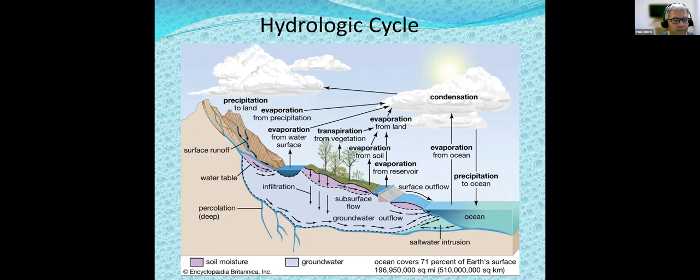Now, the next 2 slides I took directly from the Texas Water Development Board report from 2022. This report is updated every 5 years; the most recent is 2022. This just highlights the continued challenges for those of us who live in Fort Bend County and Texas in general. We'll be providing a link to the interactive version of this report on the PowerPoint, so you can go in and check it yourself. There's a lot of information if you're interested.

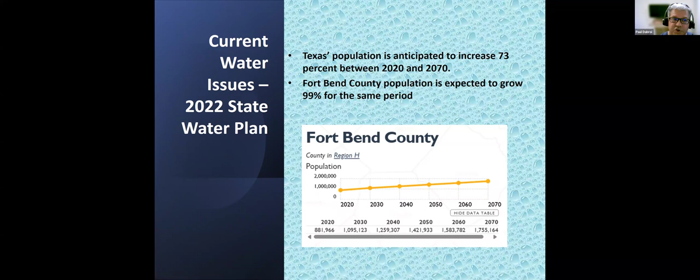Now, at the same time, projections for water are for water needs to outpace water availability over the next 30 to 40 years. If you look at the chart on this slide, Fort Bend County demand could exceed supplies by as early as 2040, as indicated by the purple bars.

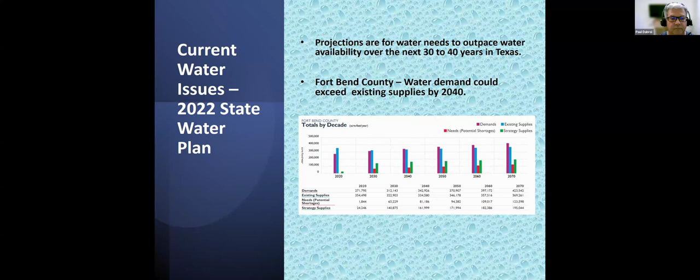This slide is from Water My Yard, and they state that over 50% of landscape water is currently wasted due to overwatering, inefficient watering practices, poor maintenance, etc. By 2070, probably 10% of new water supplies are expected to come from conservation, and that means doing more with less.

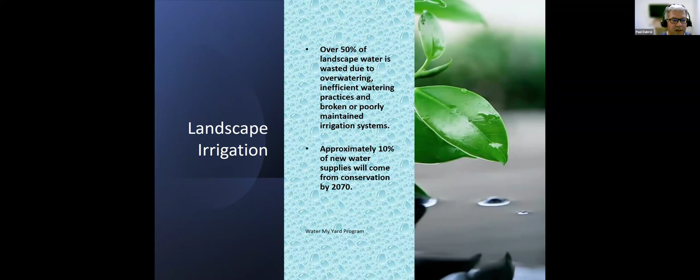Future landscapes must conserve water to be sustainable. The second bullet is very important, that irrigation efficiency should be considered during the landscape design process. As they design these master plan communities, if they spend a little more time designing efficient irrigation systems, we could save a lot more water. And the bottom bullet, obviously, landscapes do not waste water. People do.

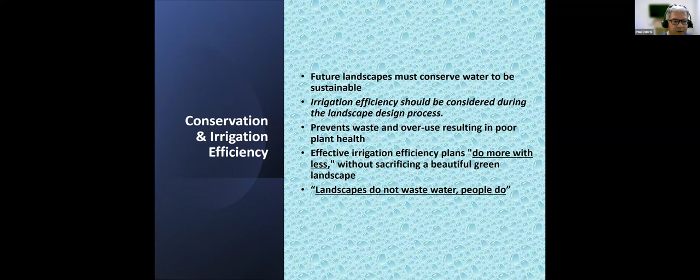So what are we going to learn today? By the end of this presentation, we hope to help you understand how to audit, maintain, and repair your system - minor repairs. We'll explain how to modify your system for greater conservation and savings, review best management practices, and hopefully increase your confidence in maintaining your own system.

I tried to come up with three basic pieces of advice I could give a homeowner regarding their irrigation. Number one, water only when needed. Two, apply just enough water. And three, maintain your system. From this point on, everything we discuss for the remainder of the presentation can be connected to these three points.

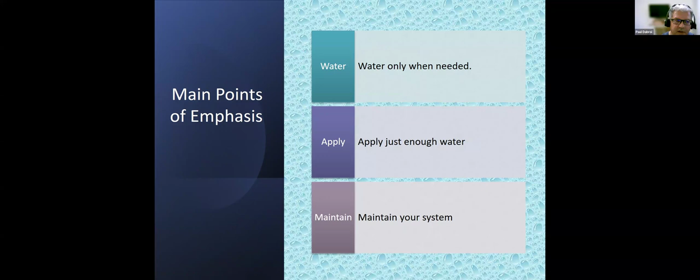A little about irrigation efficiency. Water usage during the summer increases between 35 and 70%, primarily due to irrigation. It's estimated that 89% of single-family households have irrigation systems. That's a large number, but it also includes people who just have a hose. And a high percent of homeowners don't fully understand how their irrigation should work.

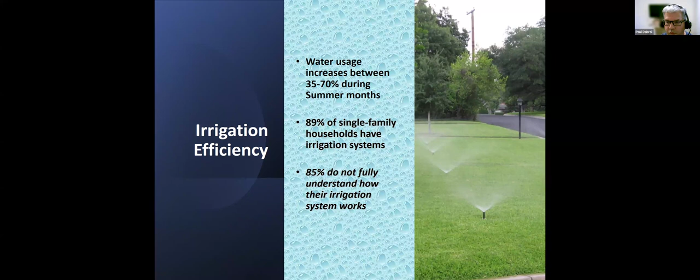You've probably heard many times that the average homeowner overwaters, not necessarily because they intend to - they just don't know how often, how long, individual plant requirements, how to set their irrigation controller, and how to maintain their system.

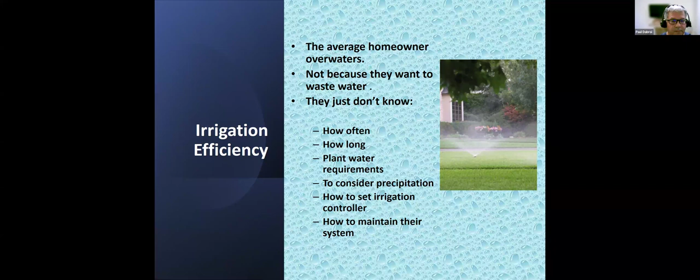Best management practices - this is important. The first bullet was discussed at length in the earlier presentation I mentioned. But as a rule, if you're going to run your irrigation system, you should run it early in the morning and be completed no later than 10 a.m. Actually, the sun becomes pretty strong after 8 a.m., so 8 a.m. would be my recommended cutoff. If you need to judge water needs for your landscape, do it in the morning before it dries out and shows signs of stress. Water deeply and infrequently - we will repeat this throughout the presentation.

Your lawn should only need to be watered once or twice a week. I only water my lawn once a week - Sunday night, system comes on at 1 a.m., I run 4 cycles, 8 minutes each, done by 5. Regardless of whether we have drought or near drought conditions, that has worked fine for me as long as I've lived in Texas. You want to water slowly for better absorption.

Use drip irrigation or soaker hoses where possible in non-turf areas. One inch of water will penetrate to a depth of about 6 inches. Use cycle and soak - that's basically what I just described, and we'll discuss that later in the presentation. Try not to water on windy days - this used to say do not, but it's Texas, do your best.

You should check your irrigation system monthly to make sure it's operating properly. I can't say I check mine every month, but I do it on a regular basis, and most of the time I'm confident I've caught most of the major issues.

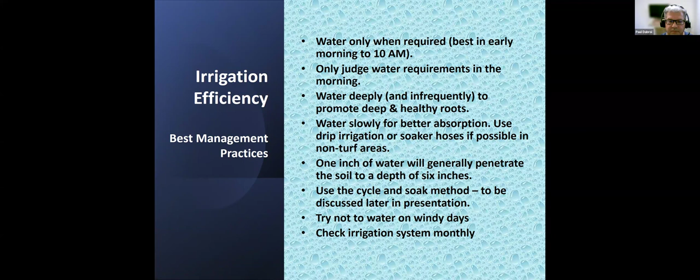This is a good quote that can apply to a lot of things, and many of you have probably heard it already: the best fertilizer is the gardener's shadow. This can also apply to irrigation systems as well, and what it means is a little vigilance goes a long way in eliminating or reducing most problems.

Next we're going to get into the components of your irrigation system. These are the main components you'll see in your system - some visible, some not. We'll start in the bottom right corner - that is your backflow preventer, which is basically a one-way check valve that prevents contaminants from your irrigation system from getting into the water supply. I'm going to guess most towns in the Houston area mandate this for residential irrigation systems.

Then we go to the controller, that we'll spend a lot of time on in our next slide. The controller determines when you're going to water, how long, which zones, etc.

Let me make sure my pointer works here - okay, there we go. This is the control valve, and this opens and closes based on your program to direct water into your sprinkler heads. A couple different sprinkler heads here on top - we have pop-up rotors, and then just pop-up spray sprinklers.

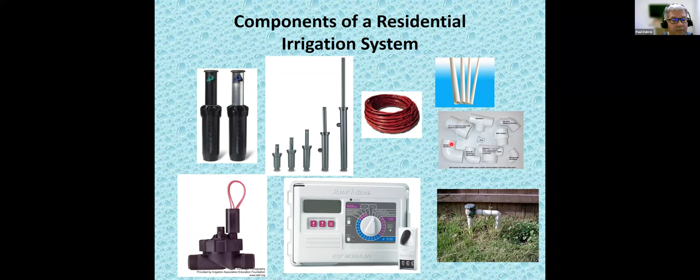So this is the controller, and this is the brain of the system. There are many brands and models, many with similar features. We've chosen this one not because we're endorsing the brand, just because it's representative of what you might see when you go to purchase an irrigation controller. This particular controller will allow up to 22 zones. That is a large yard. I only have 6 in my yard.

I'm going to go around the dial here and explain what all these features are. The red here is off, that's my favorite setting. You should only run your irrigation system to supplement natural rainfall, so if you don't need water, turn it off. The auto setting will basically run your different programs. So if you program your system to come on a certain day for a certain amount of time, you just click it to auto and it'll continually repeat that cycle.

The blue buttons are just basic settings. When you first plug in your controller, you're going to set the current date and time, and from there you'll set your start times, how long each zone is going to run, and which days each zone is going to run. This particular controller also offers additions of different weather sensors, like a freeze sensor and a rain sensor.

There's a seasonal adjustment setting, and what that means is you can change the amount of water you're distributing based on the time of year. So for instance, if 10 minutes was your baseline, that would be 100%. In August, if you wanted to run for 11 minutes, you would change that setting to 110%. Same thing in early spring - you're just turning your irrigation system on, you're still getting some rain, so maybe you only want to run it at 90%. If you want to run it 9 minutes, you change that setting to 90%.

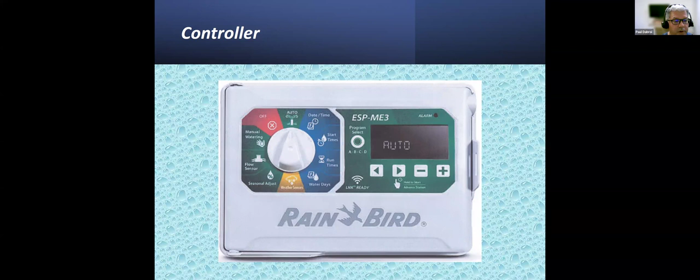With the LNK-ready function or option for this particular controller, you can control your controller through an app. If you absolutely need another app on your phone, here you go.

Now we're going to take a quick tour, and after the tour we'll answer a few questions. So if you were to rip the lawn off your yard, you would see something like this. The only visible parts of your irrigation system would be the tops of your valve boxes, and maybe the actual tips of the sprinkler heads. We're going to go around here and take a few minutes.

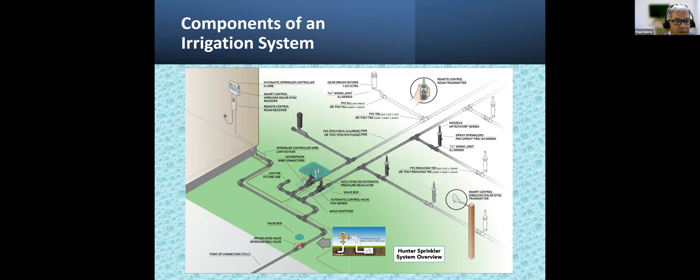Our first stop is the shutoff valve. You may or may not have a shutoff valve in your system - I don't. If you have it, it may be buried in your lawn, in your planting bed somewhere. If you don't have a dedicated shutoff valve, you can shut off your system from the backflow preventer.

Next, you have your valve boxes. This particular valve box has a green square cover, and it contains 2 valves. At my house, I have six zones, 6 little round covers, one valve in each one. These are always underground. This particular system also has a dead-ended cap for future use. So let's say you wanted to add another zone, like a dedicated zone for drip irrigation - you already have a means to do that.

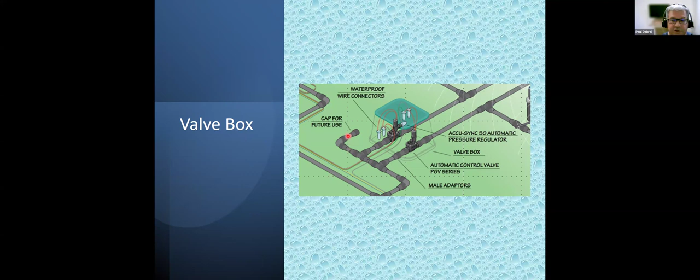These are just traditional pop-up spray heads. This piece here that's circled is the solar sync transmitter. This sensor automatically adjusts the controller runtimes based on the local weather data. It helps to reduce usage. It is contingent on a reliable wireless connection.

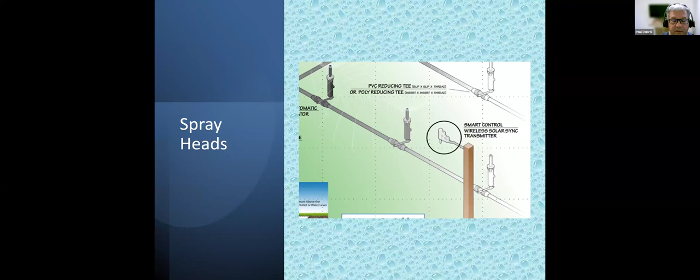This is just a rotor. Rotors are high input sprinkler heads used for large areas, playgrounds, golf courses, etc. It's shown on a swing arm type connector, which gives you a little bit more flexibility regarding direction, height, etc. And then obviously the controller, we've already talked about that.

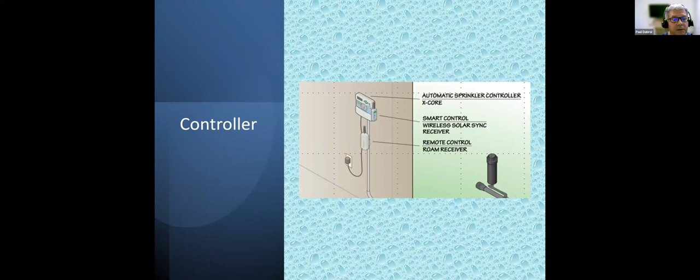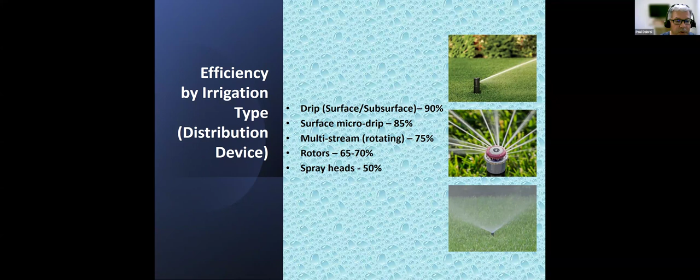All right, we're going to keep going. Drip irrigation. So let's start.

Okay, so drip is about 90% efficient, and again, good for your entire landscape, including lawn. Micro drip can be used in rows for individual plants and containers.

And so looking at the photos above here, starting in the bottom right, this is what I just call a commercial type drip tubing. This is half inch. It's arranged in a grid, and it'll distribute water at a uniform rate across your planting area. Depending on the type of soil you have, will determine what the recommended spacing is. So for instance, for clay soil, it might be closer together than if you had a sandy type soil. You just need to follow the manufacturer's instructions.

The two top photos show a micro drip system, and they also deliver water with a half inch, I call it feeder tube, but then you can branch off into these quarter inch thick tubing, and you can have either a traditional drip line like is shown here, or there's different types of nozzles that I'll show in the next slide. And I mentioned this can be connected to your hose spigot.

This is actually one for my house. And so what you have here is you have your timer, and then there's a wire mesh filter, and then a pressure reducer. And again, I've used this for a few years, very happy with it. Really easy for do-it-yourselfers to put in a micro drip system.

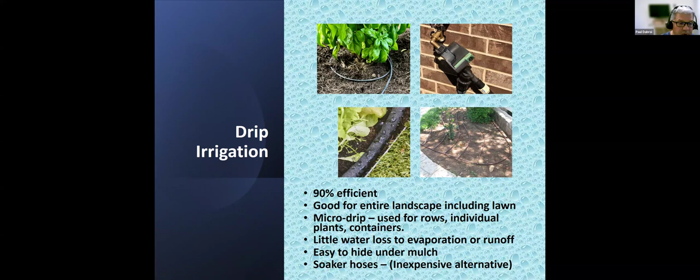And so these are the different nozzles, drippers, etc., that are available with micro drip. This would be just a traditional drip line. The spacing can vary between, say, 6, 12, 18 inches. All types of little emitters that you can just plug into the main tubing. The output really varies by what you're trying to accomplish, the size of your plant.

And then actually just little miniature sprayers. This is a rotating sprayer similar to the rotating nozzle. It's just at a much lower rate of volume. And it's funny, I heard a presentation recently by a popular gardener on YouTube, and he uses micro drip, and he said he prefers the sprayers versus the drip line just because he can see it. He can see the water coming out, gives him a little bit more peace of mind versus if it's a drip line, which is trickier to see, especially if you have your bedding covered in mulch.

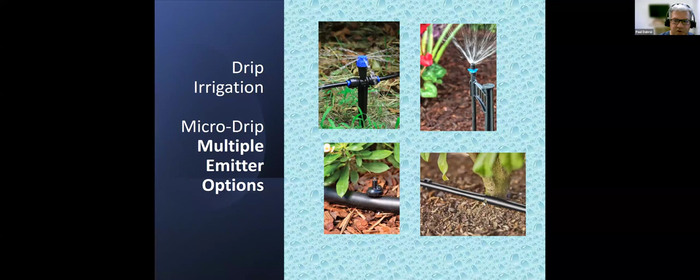All right, and so we talked about connecting a drip system to your irrigation system, and here's an example in this illustration. You have your irrigation valve as a built-in pressure reducer, and then you also have your mesh screen filter.

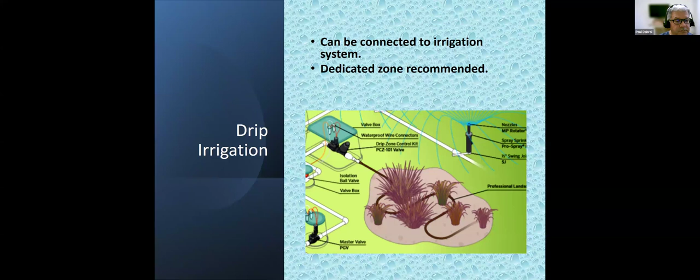Now next we'll get into how to audit and repair your system. The first thing you're going to want to do is become familiar with the basic components of the system. You want to learn how to do a manual station run.

As you're auditing your system, remember the gardener's shadow - walk around your yard once a day, take a look at things, gauge the condition of your plants. Looking at your plants and lawn can give you a heads up whether you have an irrigation problem. For instance, if you have a perfectly round dry spot in the middle of your lawn during summer, that may indicate that particular pop-up is not working correctly.

Same with your planting beds. You have a long bed of ornamentals - half the bed's looking kind of dry, half the bed's looking good. Same thing, check the irrigation in those areas.

Look to see if anything's obstructing the spray - you might have to trim the branch off a shrub. Misaligned heads where water is going where it should not be. Those are the easiest things to fix.

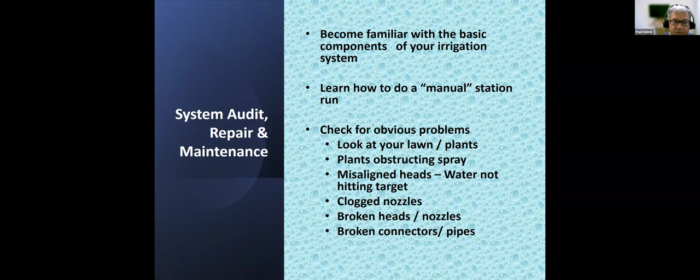You could have clogged nozzles where the spray pattern isn't uniform, or the riser on the pop-up sprinkler head is not popping up as it should. Broken heads and nozzles are pretty obvious. You could also have a broken connector under the sprinkler, or in some cases a crack in your white PVC tubing. We'll go over some of those here in a minute.

When it comes to repairs, I like to look at this like a medical procedure - proceed from least invasive to most invasive, or from easy to more difficult. The easiest things to fix are adjusting the direction and distance of the spray on your individual sprinkler heads.

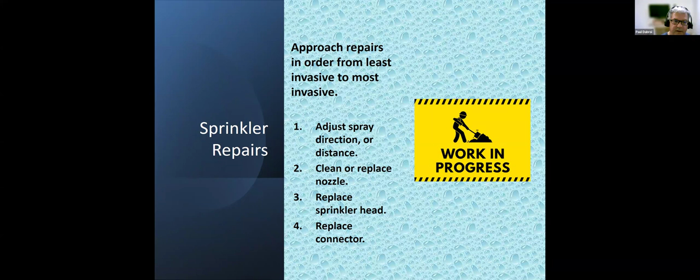Cleaning or replacing the nozzle can be done without removing the entire sprinkler head and digging. If you have to remove the sprinkler head, it's fairly straightforward - you have to dig, unscrew it, replace it, make sure it's aimed in the right direction, and occasionally replace that connector between the bottom of the sprinkler head and your tubing.

I use it to cut the connectors if I need to lengthen or shorten a connector to lower or raise the sprinkler. I've never had a situation where I've actually had to cut the white PVC, and then a utility knife is always handy.

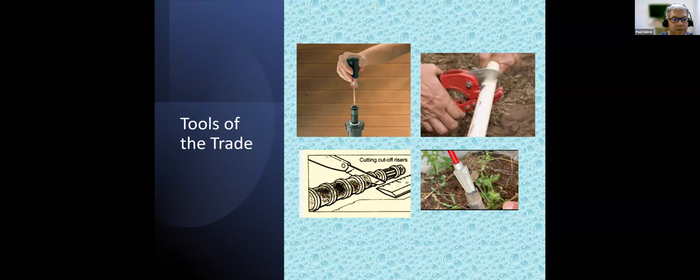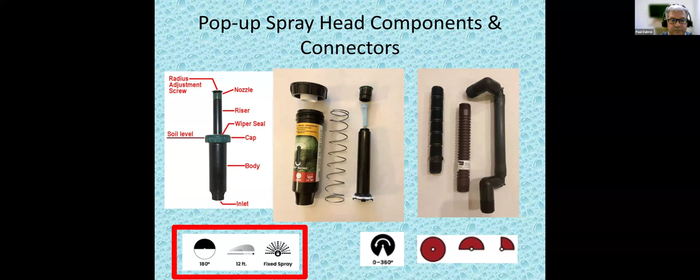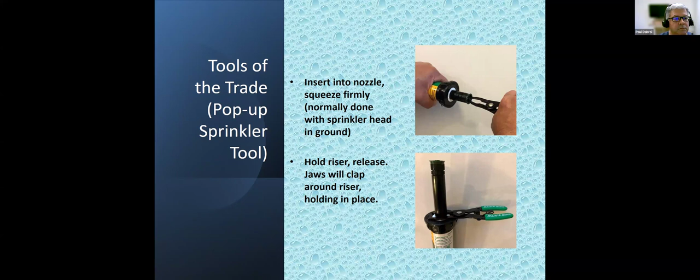All right, next we're going to go through some common problems. Now, I'd love to be able to say that I am somewhat immune to these issues, but sadly, everything we look at here, I've probably seen most of these in my own yards.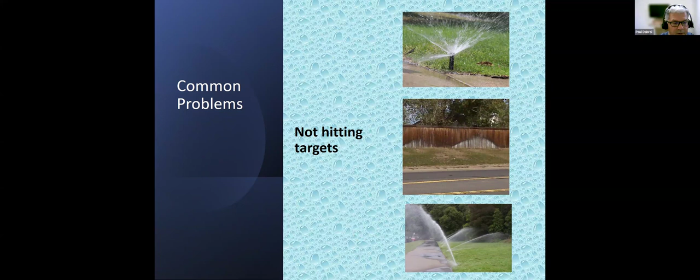This is a rotor that is obviously going in the opposite direction of where it's intended. Pop-up rotors, it depends on the rotor. Some can be adjusted by twisting the riser. Others have a set of screws in the top of the rotor to make those adjustments. But by far, direction is the easiest problem to correct in your system.

Okay, next, the top example, it could be you have a sunken sprinkler head. Over time, the sprinkler heads, your lawn settles, the soil settles. What used to be level with the surface of the lawn now could sink a couple inches, so now when it pops up, it's not clearing the grass. That situation, you'd want to remove the sprinkler head, remove the connector, add a connector with an inch or two extension below, whatever you need, and reinstall the sprinkler head.

You should be good. Now, it could also be you have thatch that's built up over the sprinkler head, let's say during the winter. So try to clear away the thatch and the obstruction. Again, turn it on, see if that'll solve the problem. If not, we keep working our way down.

If there's very little water coming out of the sprinkler head, but water seems to be coming up around the body of the sprinkler, it could mean you have a broken body of the sprinkler head itself, or a broken connector beneath it. Bottom example shows this is a rotor, and it appears to be spraying, there's water coming out of it, but you can see there's water pooling up around. So there's some kind of leak underneath the sprinkler head that's causing that issue.

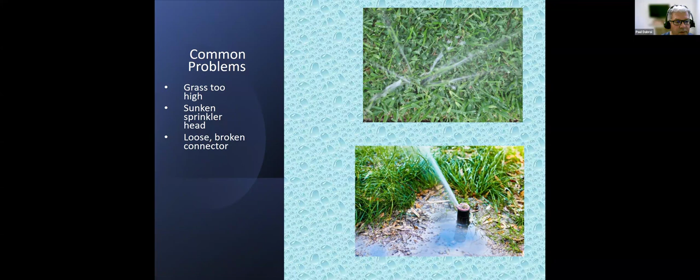All right, geysers of various types. Gotta admit, I had one of these last year. Apparently, I ran over the sprinkler head when it didn't retract properly. Again, pretty easy to fix. You really have to just replace the sprinkler head, unless the nozzle for some reason just popped off.

When this occurs though, it's important you react to it quickly, because while this geyser is going, it's also lowering the pressure for all the other sprinklers in that particular zone. And if you see this happening at your neighbor's house, put a Post-it on their door or something, let them know. I certainly would have liked somebody to make me aware.

This example here is a large pop-up sprinkler, probably in a landscape bed. You can see here there's some ornamental grass around it. Maybe it didn't retract, somebody tripped over it, who knows. The example on the right here, it looks like for whatever reason, the entire sprinkler head disassembled and parts were ejected.

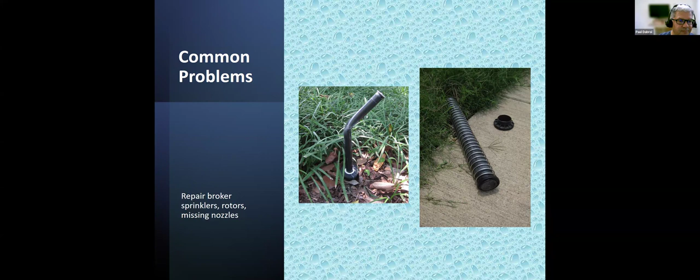In this example, I'm not aware of anybody having a problem with excess pressure around here, but you can see what's happened here is the water coming out of the sprinkler head is atomizing as soon as it comes out, and it's just creating a fog that's hanging in the air, and any little puff of breeze is going to move that water somewhere where it wasn't intended to. Now, the only way to handle a pressure problem is to install a pressure reduction valve on your system, and most likely you would want to call a contractor to do that.

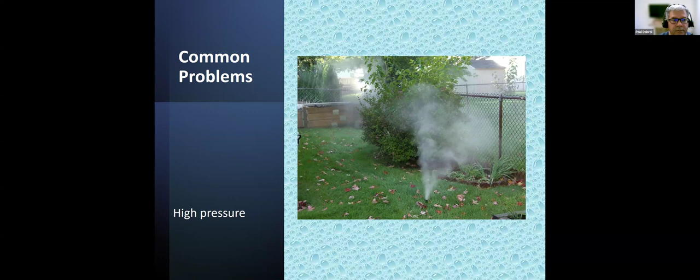Backflow preventer freeze damage. Okay, don't let this be you. All right, show of hands in the audience, who has had this problem? I see a few hands out there. All right, yeah, if you don't cover and insulate your backflow preventer during the winter and you have a freeze, this can happen.

The bottom photo here just shows what looks like a cracked bell on top. The top photo shows what can happen when there is damage. The first year I moved into my house in Fulshear, we had a freeze. I came home from work, got out of the car, heard a loud hissing noise, and sure enough, a part had cracked in mine, and we were able to get it fixed.

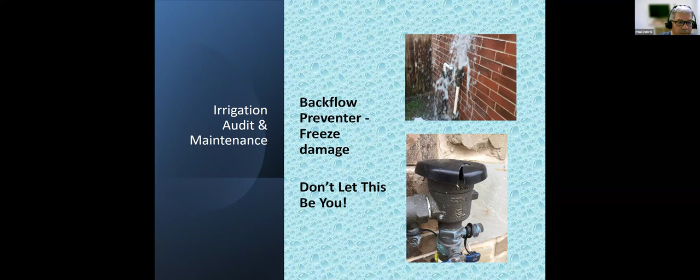All right, now, easy way to prevent this. So what I do is December 1st every year, I close both valves on the backflow preventer. I open the bleed screws to drain any water out. I pop this cover on it, and I'm good for the winter. I would advise, if you're going to use something like that, buy it now or buy it in August. You're not going to find one in January when a freeze is predicted.

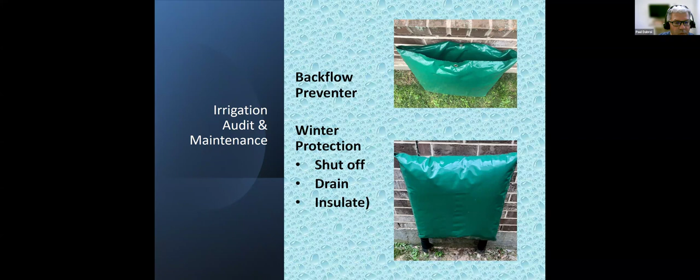And when it comes to running your irrigation system on auto, really 6 months between May and October is the only time you should need regular weekly watering of your lawn. After October, your lawn is not growing vigorously, and it can do very well with less water.

Your drip emitters, we were talking about combining drip in one of your normal irrigation zones, and this is what I was trying to emphasize here. You see, the drip emitters will dispense gallons per hour versus gallons per minute. So 1/2 to 2 gallons per hour versus 3 gallons a minute is a huge difference. And so if you were going to try to have both in the same zone, again, something's getting too much water, something's not getting enough. And the actual amounts are going to vary depending on the pressure, manufacturer, maintenance, etc.

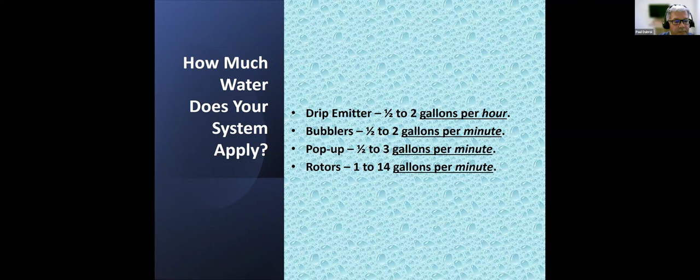Okay, determining irrigation rate. You do not know how much water your irrigation system is applying to your yard unless you measure it. To do that, you can use what they call a catch can test.

The way you do this is you set out the cups in regular intervals within each zone, run your zone for 5 to 10 minutes, measure, record the results from each of the cups, and then you'll calculate your inches per hour, which we will see here.

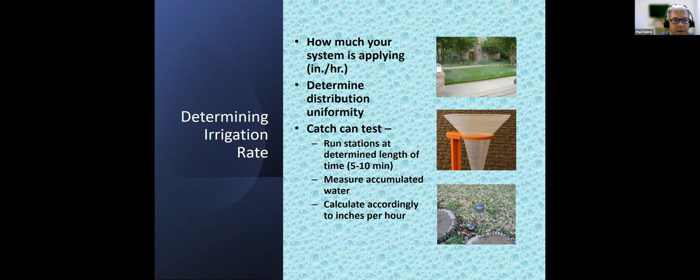So here we go. I recently did this in my yard, and I was pleasantly surprised. For this example, I basically just cut and pasted the formulas from the Aggie catch can test document, and I applied the actual measurements from one of my zones. For this particular zone, I set out 9 different cups, ran the zone for 10 minutes, and recorded the depth of water in each, and that's what you have here. I have some coverage issues in this particular zone. We'll talk about those in a minute.

So basically, you add up all the measurements, and that came to 2.15. If you divide that by 9 cups, that's an average of 0.24 inches in 10 minutes. Divide the 0.24 by the number of minutes, and that gives you the amount of water you're applying per minute: 0.024 times 60 minutes. If I ran this zone for an hour, I'd apply 1.44 inches. Now that's a lot. If I convert that to how many minutes I would need to reach an inch, that would be 42. Basically, if I know that zone is dispensing at 0.024 a minute, and I divide that into 1, it gives me 42.

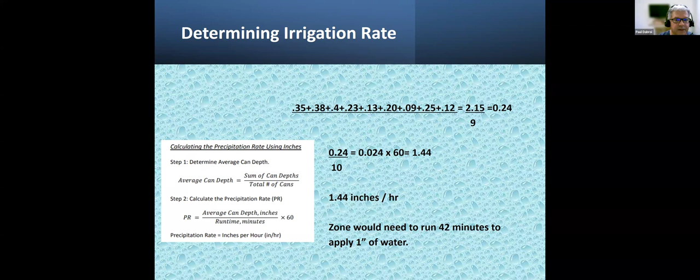All right, now we'll get back to cycle and soak. The best way I can explain the benefits is to consider what happens when you're watering a potted plant or plants in your landscape beds with just hand watering. If you allow the soil to dry out and you go to water the pot or the plant, you notice that the water will pool in the top of the pot or around the plant, and it takes a while for that water to percolate in. Then if you go back a second time, you notice it absorbs fairly quickly. Well, the same situation can occur on your lawn, and that's why cycle and soak is recommended.

I'd say the first line here kind of sums it up for me: deep and infrequent watering trains your roots to embed deeper and spread wider, making them more drought resistant, creating a healthier plant. You can see in the illustration here, if you're watering frequently but only for a short period of time, the root structure is going to be concentrated in the first 1 or 2 inches of your soil. So if drought were to occur, you don't have enough roots reaching deep for water. Deep and infrequent watering will give you that deep, thick root structure, which will allow your lawn to be better able to survive drought conditions.

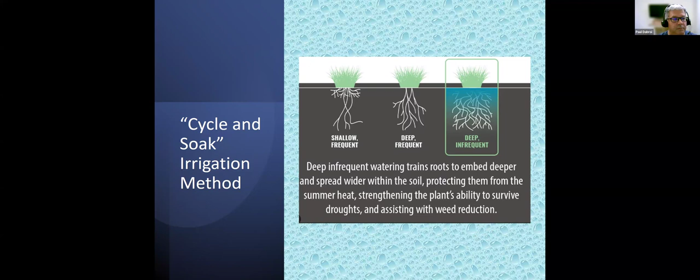So some more details here. This is recommended for clay soils and slopes. You can use this in your lawn area as well as landscape beds. You can do this different ways. My controller has a couple different options. The one I do will allow me to run it 3 or 4 times, and it spaces out each cycle, just depending on what you want to do.

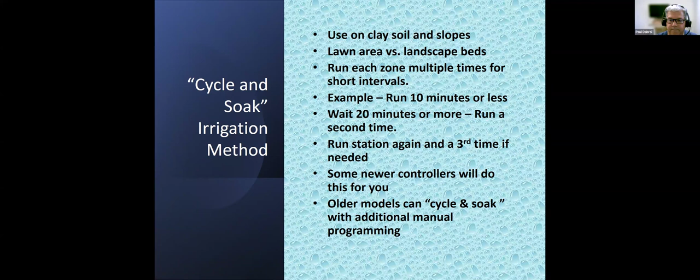There's a lot of new technologies available. You can attach different weather sensors to your controllers. On top here is a rain sensor, which I believe is now required on all irrigation systems in this area. A freeze sensor would be recommended if you live somewhere with early or late freezes in the spring or fall.

The ET controllers—ET is evapotranspiration. These controllers basically monitor weather from centralized measuring areas, then transmit the results through a wireless connection back to your controller, allowing you to water based on current conditions in your area. If you go to Home Depot or Lowe's, there are a ton of different ET controllers. I'm sure the technology will get better over time.

I cannot vouch for the accuracy of these. One concern, at least to me, is the accuracy and relevance of the information being measured. The rainfall in our area is so variable, even within the same town or county. If you're looking at rain coming through at any given time, and that green dot hits you, you have enough rain for the week. If it doesn't hit you, you're dry. So from these remote monitoring areas, as long as that measurement is relevant to my yard, I would be more likely to trust the results.

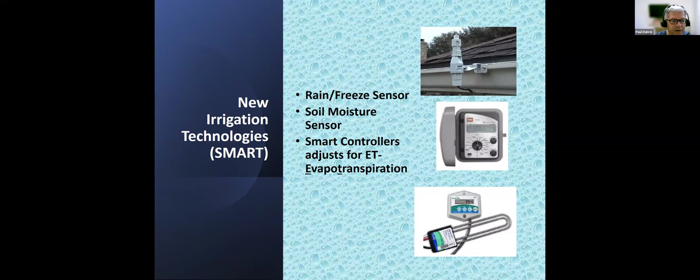I think I'll add a few more slides to this presentation for this area. Apologize for all the text on this slide—this just describes the differences in the ET controllers regarding the information that's measured.

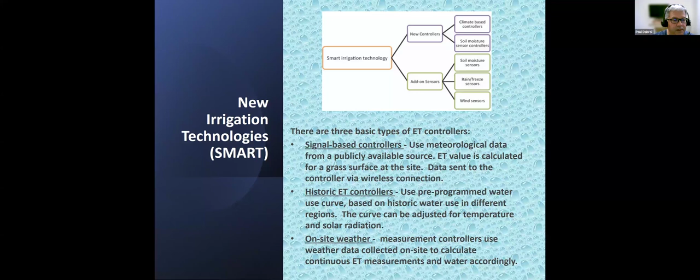One tool available to all of us is Water My Yard—hopefully you've heard of that. WaterMyYard.org is run by Texas AgriLife, and it was created to allow homeowners to download an app or go online and plug in your zip code. It'll tell you whether there's a monitoring station connected to your area. Then you put in your individual irrigation system information.

You can put in information for each zone—it'll ask the number of sprinklers, the type of sprinklers, and if you know how many gallons are being dispensed per hour, you can enter that. Then you pick a day to receive your email with recommendations for the week. I get mine on Saturday, knowing that I water on Sunday. I started this last year and I've been fairly happy with it.

You still have to use good judgment. For example, last Saturday I got a recommendation to run my system for 17 minutes, but I was looking at the weather forecast and there was a rain cloud every day next week. So I took a gamble and didn't water, and sure enough I had 2 inches of rain by Wednesday. So again, you always need to use good judgment to override your systems as needed.

The EPA also has a site called WaterSense, with a lot of information regarding water efficiency on products—appliances, faucets in your house, as well as irrigation. There's a WaterSense certification that products need to earn to have that designation, and if you go on the site, there's a whole list of controllers that meet this requirement.